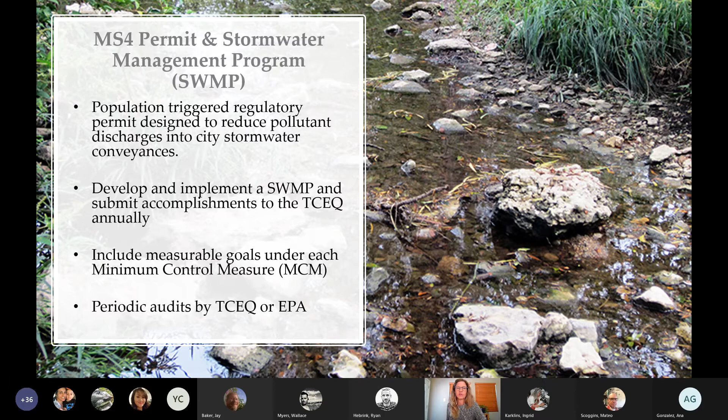So within those MCMs, minimum control measures, we have to have measurable goals. They have to be quantifiable now and measurable. So it's a new commitment for us as MS4s to develop these. So as part of this program, we also may have periodic audits by the TCEQ or the EPA. Even though TCEQ administers the permit, the EPA still can do inspections at any time of any of our permitted programs through the TCEQ. So just to distinguish between the two, the MS4 permit is on the left.

That's our front page. It's issued by the state, and that defines everything that must be done by a permittee within our SWMP. So our MS4 permit is written by the state, and then the SWMP is written by us and approved by the state, but it is specific to our city. And we just have to include everything that's required by the permit. So I'm just distinguishing because sometimes those words can be interchangeable for people, and I just wanted to separate them.

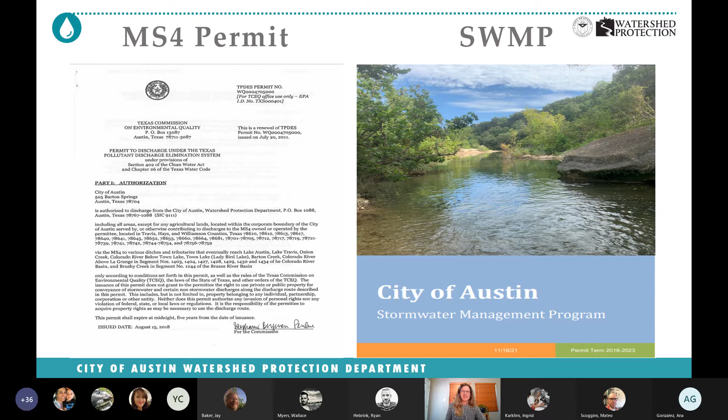So this is our permit number that we've had for many years, and it's a 5-year term. We're currently in 2018 to 2023. We're in year 4. We report by fiscal year to the TCEQ within our annual report. That's due on May 1st of every year. Every 5 years, we submit a renewal application. It's a pretty intense process, and that's supposed to be turned into them 180 days before. So the end of 2022, I'll be working on that renewal.

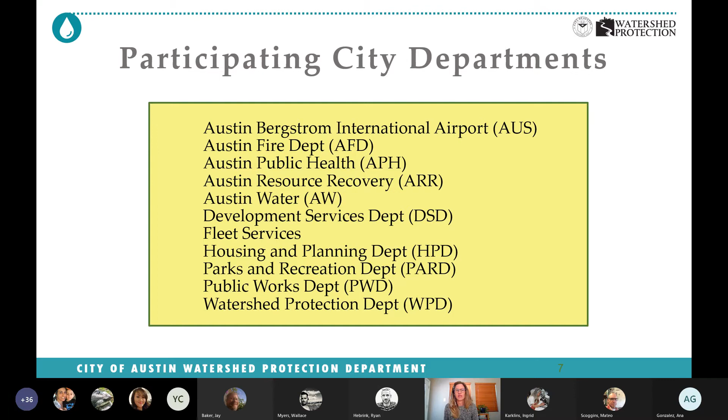And often I hear that it's a Watershed Protection Department permit, and it's not. It's a citywide permit, and there's a lot of different departments that participate in the permit. There's a lot that do more work than others. Like Austin Water has a lot of huge parts of sections within our permit. Within Watershed, historically, we've always managed the permit and coordinated it, but it is a city permit.

So our main goal for the MS4 is to prohibit non-stormwater discharges from entering our MS4. So that's anything that isn't stormwater. It's often thought of as processed water or any water that's not rain or litter or anything like that. There are a lot of allowable non-stormwater discharges, on the other hand, like air conditioning condensate or firefighting activity water.

So the goal is to reduce to the maximum extent practicable. That is one of those terms that's pretty subjective, that's used in regulations. But the intent of this is that you can't completely eliminate pollutants from discharges, but our goal is to reduce it to the maximum extent practicable. Another word they use a lot is when and where feasible.

Okay, so I'm going to go through each of the minimum control measures, or MCMs. This is not comprehensive of everything that's in our SWMP because we do have a large program, but I'm just trying to hit on each of the things that we normally include in our annual report every year. Our stormwater control measures inspection and maintenance program, that's what Matt talked about a couple weeks ago, the pond inspection and maintenance program. Also included in that is Barton Springs Zone permitting and dam safety program, and inspections is in that group too.

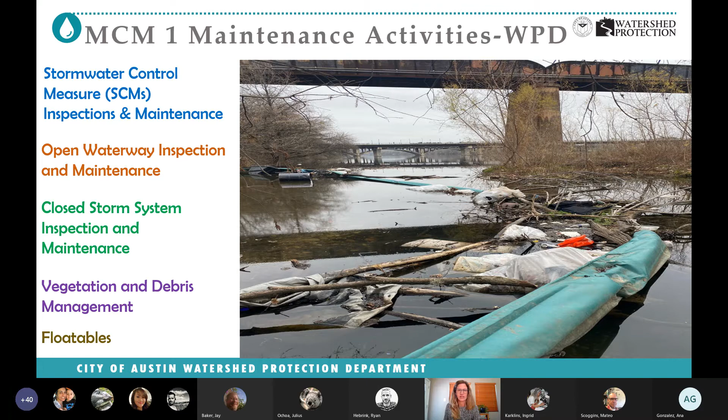So you can see this picture here. That's one of our large booms that we have as West Bouldin Creek enters Lady Bird Lake. We have 2 of these BMPs, best management practices. The other one is on Shoal Creek. So you can see that they do catch a lot of debris. So they regularly inspect and maintain these and do additional inspections following a rain event.

Also within MCM1, Austin Resource Recovery manages their litter control program. So this is everything from our curbside trash, brush, household, large waste to all of the litter units or trash units over the city downtown area. We report on how much is obtained, dead animals, everything like that. They also clean all of the streets within the city.

This is one of their units. Be aware it could be loud when it comes on. So this is following, they had a hydraulic line break on one of their trucks, and they came out and applied oil dry and then cleaned it up. I think it's a pretty impressive unit. Just keep your fingers away from the blower.

So MCM2 is post-construction stormwater control measures. That's SCM. In this section, we display that we've implemented development review processes, and we have a comprehensive planning process throughout the city and have ordinances in place to enforce all of these requirements. Housing and Planning Department is HPD, and Development Services Department is DSD. So they have goals within this section, along with Watershed Protection, where we've committed to evaluating SCMs to address water quality and erosion and flooding issues. And this is also where we report on our dam inspection.

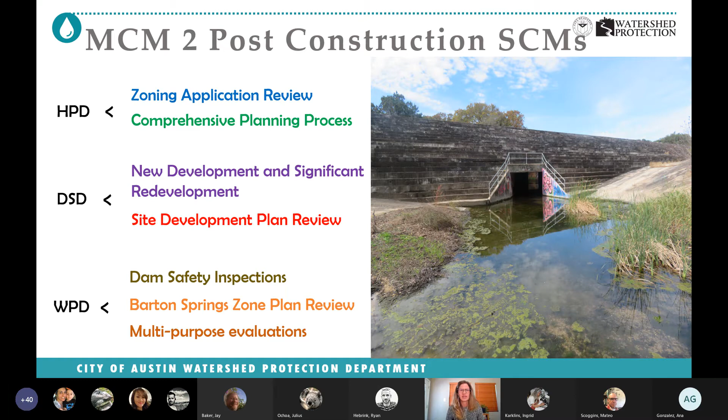I think we have 33 dams that we inspect annually, and the Barton Springs Zone Plan Review. MCM3 is the Illicit Discharge Detection and Elimination Program. So there's a huge section within this where we lay out our response to any IDDEs and our enforcement procedures within Watershed and Austin Water.

And some of the goals that we commit to for Austin Water are for overflows and infiltration. So they have two separate programs: the wastewater pipeline, wastewater infrastructure, that's all of our city lines, and then also the on-site septic facility, commonly known as OSSF. Within the septic facility program, they conduct inspections and complaint response. Those are not found within all areas of the city, but they also have an enforcement program.

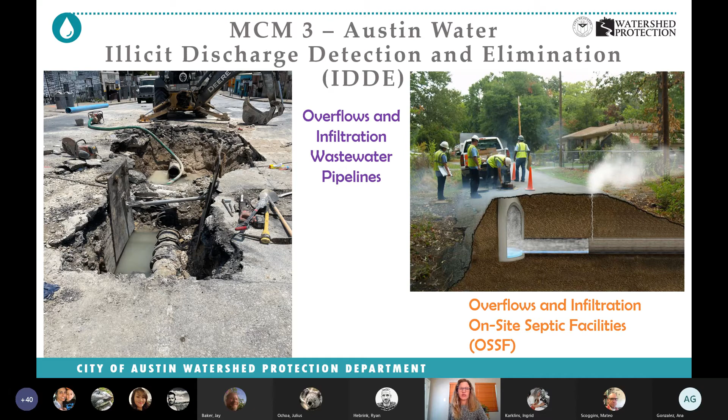Also, the wastewater infrastructure group has emergency response timelines that they commit to. They try to get to them within 24 hours. They also do inspections of lines, TV lines, smoke tests, as you can see in this picture here. That's an example of smoke testing. And they also inspect their lift stations. The goal of this is to prevent any leaks or discharges into our system.

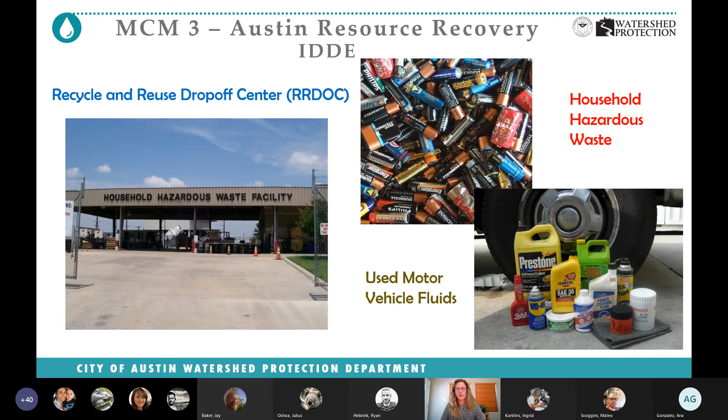Austin Resource Recovery was formerly referred to as the HHW, or Household Hazardous Waste Facility. Now it's the Recycle and Reuse Drop-Off Center. We report this as part of our MS4 permit because the goal is to keep any of these items from entering our streams, from dumping any of this waste. So they accept household hazardous waste such as batteries, paint, motor vehicle fluids, all from residential properties or from citizens. They don't accept waste from businesses.

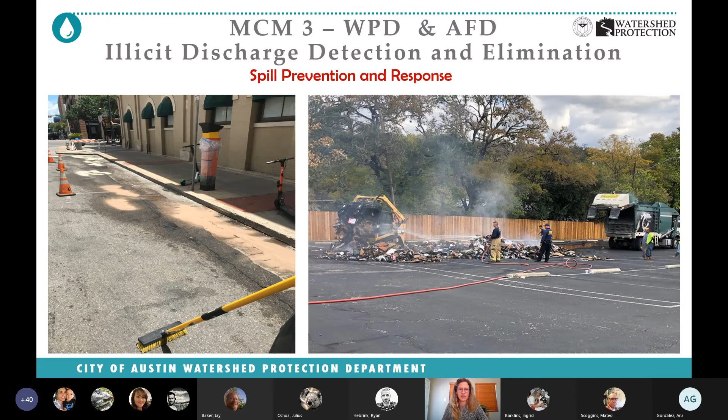More frequently than you would think, there are fires in trash trucks. And so they have to find a big parking lot to pull over into and dump everything out. AFD comes, puts the fire out. They call Watershed, and we respond to make sure there wasn't any impact to a nearby creek. AFD is pretty good about putting out boom to prevent anything from entering the storm sewer. In this picture, there's a forklift that was able to spread out the dumped material in order to put the fire out.

MCM4 is pollution prevention for municipal operations. So this includes an inspection program. Watershed, through water quality compliance, does inspections of our municipal operations and helps make sure that they're in compliance with waste handling and storage. And then each department that has municipal operations like Fleet, PARD, Austin Water has to implement a training program that we report on to the TCEQ within our annual report, on how we handle waste and how we prevent pollutants from discharging off-site when it rains.

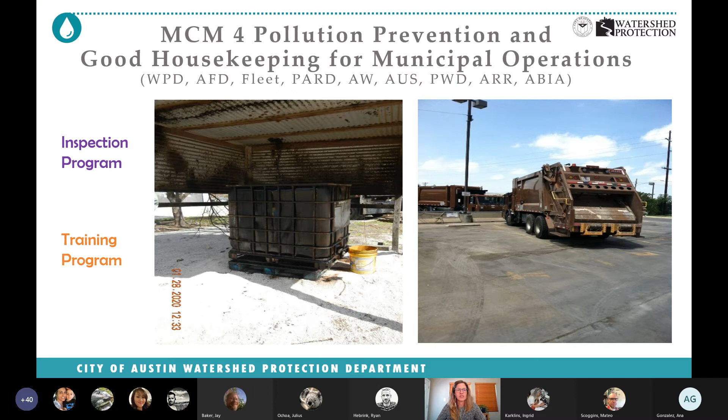Also within this section is the Integrated Pest Management Program. So there's kind of a dual side to this program. There's education and outreach to the public, training for landscape professionals, but then also the Grow Green group and the IPM group work with employees at municipal operations to make sure that pest treatment is being done responsibly and applied as required.

MCM5 is the industrial and high-risk runoff. This is mostly an inspection program for industrial facilities. So AFD permits all above ground hazardous materials and they do inspections of those sites. And then DSD, Development Services, permits underground storage tanks. They go out to new installs and they have an inventory of all of their USTs that have been installed and conduct inspections of those.

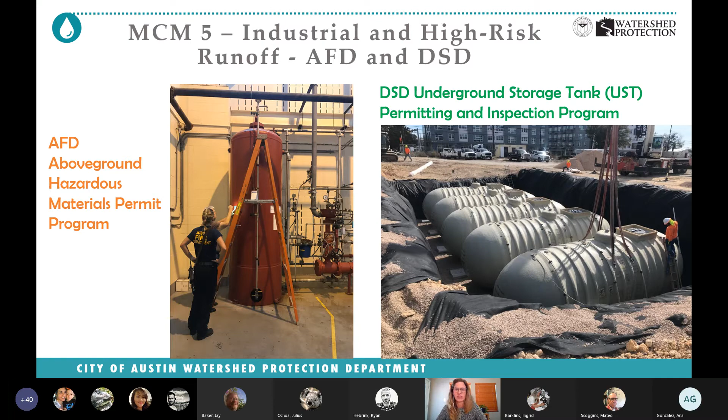Watershed, within water quality compliance, has an industrial facility permitting and inspection program as well. It's any facility that stores or handles waste oil, typically auto shops, auto salvage. They also permit fueling facilities. Another program that they manage is the multi-sector general permit, that industrial permit that I talked about earlier that the TCEQ administers.

So Watershed conducts inspections of that program of facilities that are permitted or need a permit. We don't have enforcement authority. It is a state permit, but we try to work with facilities to get compliance. So there's a lot of different facilities that fall under this, not just chemical plants and concrete batch plants. This on the right is an example of a facility that needed an industrial stormwater permit.

This is super duper stinky water coming into this pond from this culvert at an industrial park. There's a view of it through the storm sewer grate. Just a real gunky mess. And surprise, it's carrots. And there were beets and the water was red, and zucchinis. And so food manufacturing falls under those industrial facilities.

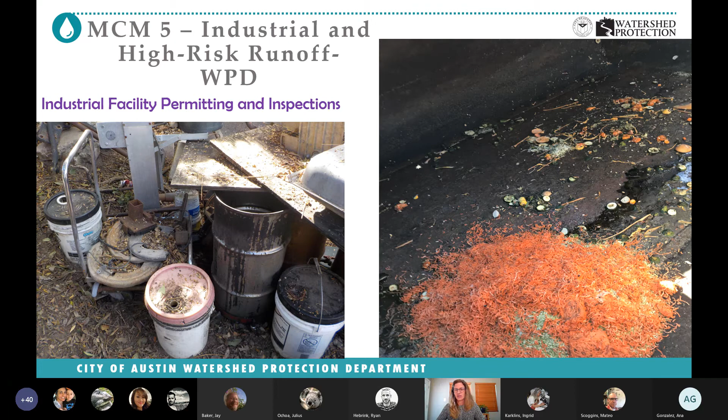I saw your question there, Ana, about restaurants. That doesn't fall under there. Those aren't like manufacturing. This is mostly for products that are made and sold maybe in a grocery store or something. Restaurants are permitted, like their grease traps are permitted by Austin Water, and they have an inspection program for those as well too, the industrial users.

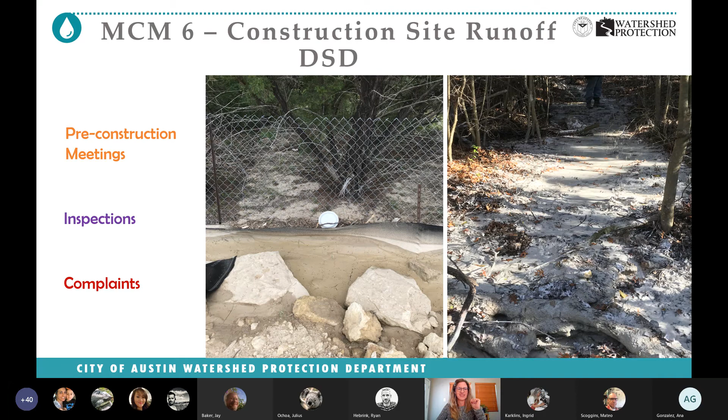So DSD is the lone department in the construction site runoff, MCM6, and they conduct routine inspections and complaint inspections. Part of their commitment within the SWMP is to do pre-construction meetings so that they provide educational material to the contractors. So the left is a typical failing silt fence. On the right, that is drill mud. It's a little less common, but a super messy construction discharge that occurs occasionally. That's not supposed to.

Monitoring programs, I'm sorry, I got to get this laser off or I'm going to be zooming it everywhere, are solely under Watershed Protection. We are the lone department that commits to these programs. Wet weather screening, that's something that I do following a rain event to see if there's any indications of illicit discharges. Dry weather is under water quality compliance. Those are screenings done during dry weather to look for any flows that are not rain.

Storm event monitoring, that's conducted at 4 outfalls during permit years 1 and 4 of our 5-year permit term. Also within that monitoring program is baseline chemical, physical, and biological monitoring, which is on a rotating basis every other year, and monitoring of the Barton Springs pool complex.

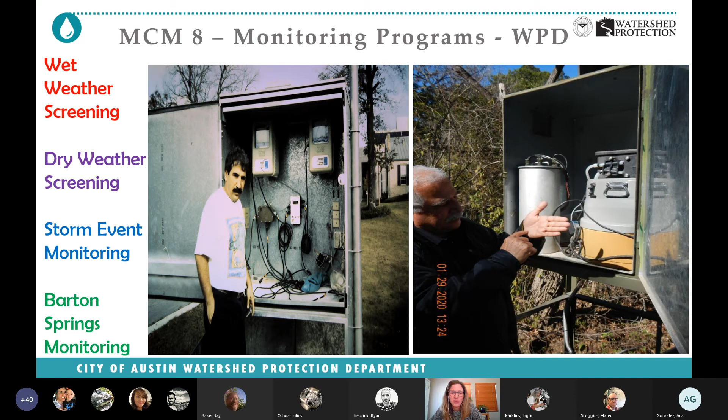So here's Andrew conducting monitoring for our biological monitoring program, and the right is an example of a storm event that might be monitored. This is one of our special people that manages our storm event monitoring. You can see him 30 years later still keeping up with his equipment.

So we're going to change gears to the TMDL program. The TMDL, total maximum daily load, is like a pollutant budget. It tells us the greatest amount of a particular substance that a waterway can receive and still support its assigned use, which for all of our TMDLs in the city, the substance is bacteria and its assigned use is recreational.

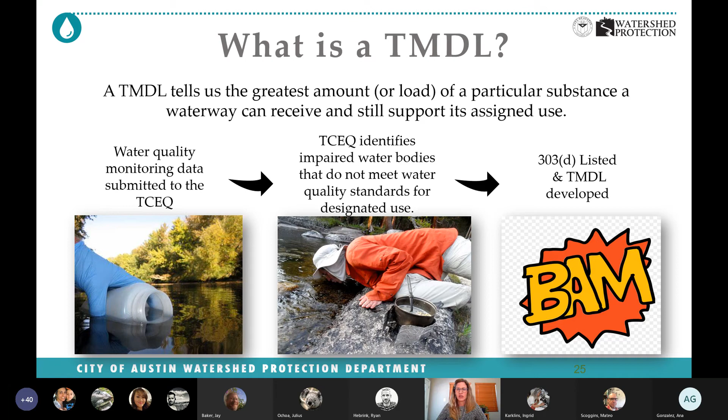Monitoring data is collected by the TCEQ and also submitted to the TCEQ from the city or local authorities. And then the TCEQ identifies any impaired water bodies that don't meet these water quality standards and puts them on a 303(d) list. TCEQ then will develop a TMDL. This is done through data collection and analysis in a watershed. It's a document that includes comprehensive information about the watershed, such as land use, any discharge facilities within that watershed, and monitoring data. It's a huge document. That's just a few things that's included.

Gonna go through a short little timeline here. So in the past, stakeholders such as MS4 operators, community groups, environmental groups would meet to develop an implementation plan, or an I-Plan. This has always been facilitated by the TCEQ, and it's been a set of voluntary strategies to achieve the goal of pollution reduction. So the plan is adopted by the TCEQ, approved by the EPA. It's a 5-year plan, and then each year the group meets to see if any revisions are necessary. So currently, TMDL measures are now required to be in our SWMP.

So the SWMP is part of the MS4 permit, so that makes them regulatory measures now. So it kind of changes the dynamic of what an MS4 commits to, since it's not voluntary any longer. The I-plan process still goes on. There's still stakeholders. We're in a process right now with one of our I-plans for revision, but we have submitted our TMDL measures in November within our SWMP because we are required to submit an amended SWMP. And with that, we needed to submit our TMDL measures. So I'll talk about that a little more in a little bit.

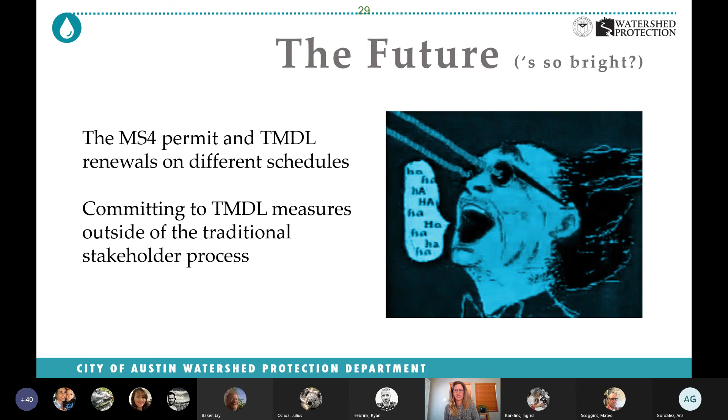What makes that weird in the future, I don't know what that process looks like, because the I-plan stakeholder group and the SWMP submittal is not always on the same timeline. So we might commit to our TMDL measures as an MS4 outside of that stakeholder process. We have 5 impaired water bodies within the city. Spicewood, tributary of Shoal, Walnut, Taylor Slough South, and Waller are all on one TMDL together, and Gilleland is on a separate TMDL. These are all impaired for bacteria and recreational use.

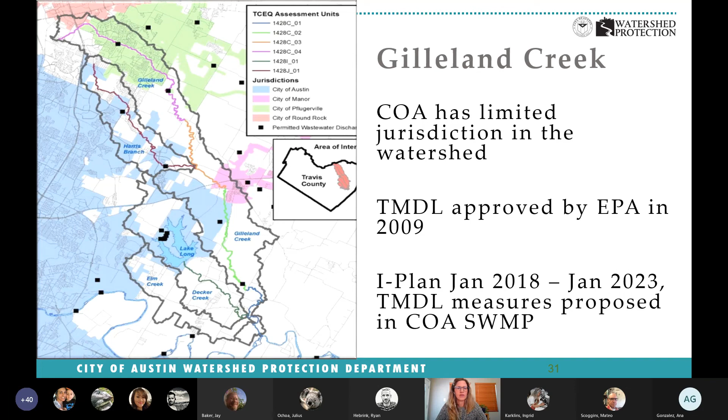So you can see Gilleland Creek here. The blue is the City of Austin jurisdiction area. You can see we don't have a lot of jurisdiction within this area. This TMDL was approved by the EPA in 2009. So this one was, I think we're on our second I-plan for this TMDL. We also submitted our measures within our SWMP in November.

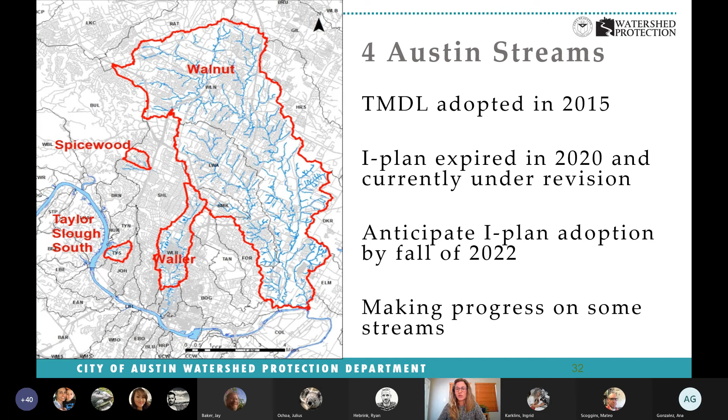So the 4 streams was adopted in 2015. We just had one 5-year period of that plan expired in 2020, and that's currently under revision right now with the adoption in 2022, we hope. Good news is we are making some progress on some of those streams. So within that SWMP, we submitted these control measures. Some of these things are things we've historically done.

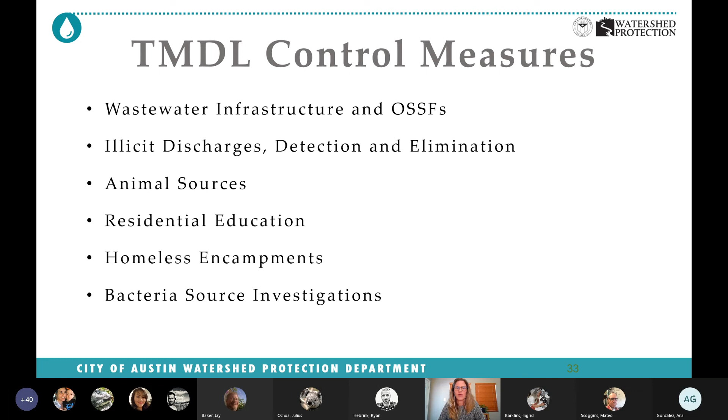We've committed to a timeline of our wastewater infrastructure inspections, which includes TVing lines to see if there's any leaks or any lines that need to be repaired that might be introducing bacteria into our systems. We also have commitments through our residential education group, with the Stop the Blob program: if there's a sanitary sewer overflow at an apartment complex that might be caused by grease, they provide educational material to residents. We have new commitments to homeless encampments, mostly through the Walnut Watershed for portable toilets. And we've also committed to more monitoring within these streams for determining sources of bacteria.

All right, changing gears. Obviously, I manage the SWMP. I submit that to the TCEQ, make sure it's being implemented, work on the annual report. Another thing is that I try to benchmark with a lot of other cities to not recreate the wheel and work together to exchange information. And I also will handle any audits and gather that information if that is to occur. I've been helping out with the wastewater permit application monitoring; as any permits go through the TCEQ, we see if any of those might affect our watersheds.

So some of the challenges that we may encounter with this program is balancing of commitments, because for a SWMP, if you take anything out, you have to replace it with something equal or better. We have to be careful with not overcommitting in case we have a year where we have budget shortfalls or are short-staffed, or there's a pandemic or a flood or anything like that. So we have to manage our commitments. All the while, the TCEQ does want us, and as a city, we want to continually improve, but we don't always get more resources to do that, right? So we have to balance those together.

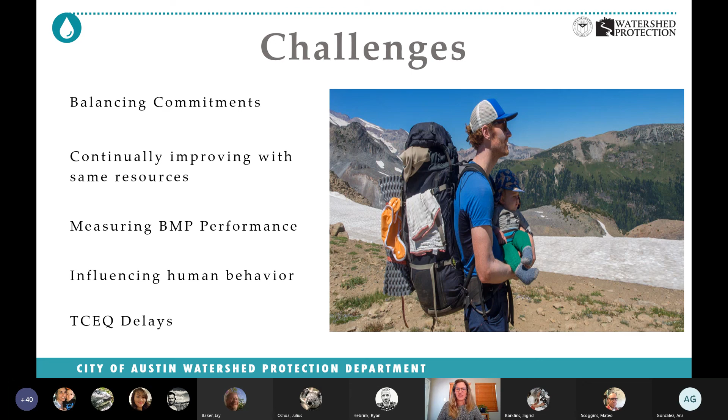So I don't actually know the person in this picture, but I was trying to think of what is challenging. And I think having a baby is challenging, and maybe a backcountry trip is challenging. And so I thought about putting those together, and sure enough, the internet delivered.